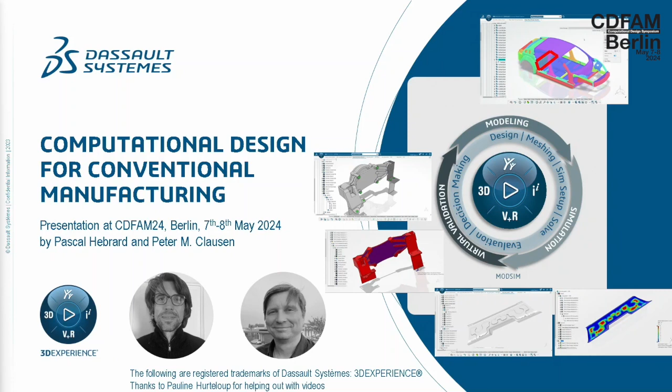I am from the simulation side of things, and we wanted to have another take on computational design, which many people have been working on for decades. I'm originally from Ole Sigmund's team, graduated back in 2005. We want to promote computational design also for conventional manufacturing, not only additive, and that's the theme of this talk.

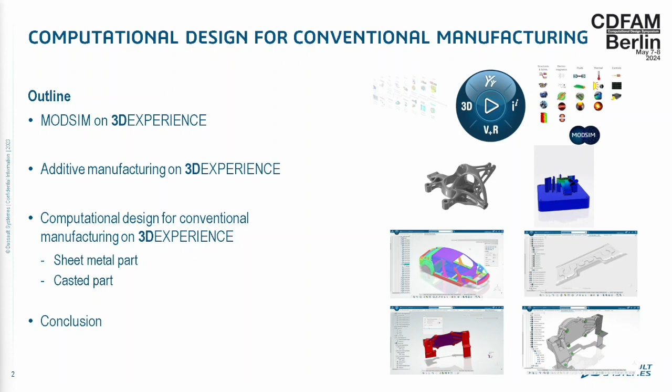The outline is: we're going to give a short presentation on what we call ModSim on the 3D experience. Then we'll briefly show what is possible today in additive manufacturing on the 3D experience with virtual prototyping. The main part of this talk covers computational design for conventional manufacturing - we'll take two parts, a sheet metal part and a casted part, and look at how that works from a computational design point of view. At the end, a conclusion and a small fun note.

Our legacy - Dassault Systèmes started back in the 80s. Abaqus, which is a finite element solver, started in 1978, the same year I was born. So we're talking about technology with quite a bit of legacy here, not like some of the startups that are probably only a decade or two old.

We started with 3D design, then digital mock-up, where you have not just one part but an assembly of parts, like an airplane or a car. Then 3D PLM, where it's not just parts but also processes - product lifecycle management. Then we moved into the 3D experience platform in the 2012s.

Here's a picture of a city where you're trying to virtualize - I think it's Singapore, yeah it is - a virtual prototype of Singapore. And we're moving into virtual twin experience for humans, so we bought Medidata back in 2019 or so. And we're moving towards the virtual twin experience for a sustainable world. I'm not sure what that means, but I hope this talk is on the way to that.

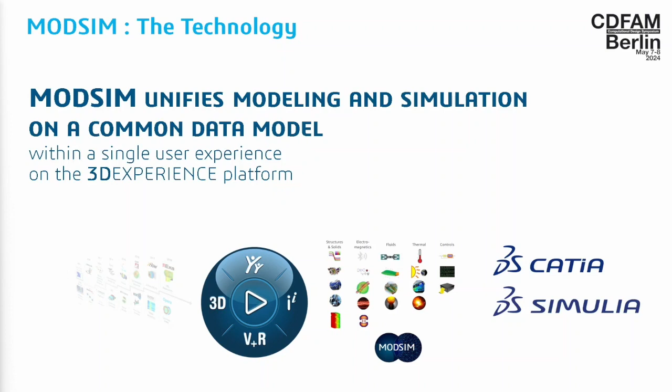The ModSim technology is basically combining modeling and simulation together in a common data model, in a single user experience on the 3D experience platform. It covers all of the physics we're able to do in our simulation. We're using mainly CATIA for CAD and simulation done by Simulia, so that would be Abaqus or Tosca - that's all running underneath.

The basis of this technology is that the old workflow basically starts with some design, and then you usually change into other products to do meshing, then execution, then post-processing, and often that can even be multiple products at some companies. That actually takes quite a lot of time to do this whole process.

The goal of the ModSim experience is you start with CAD up here, and you select your CAD, then you go into the CAE process. You do all of this, but all of it is on the 3D experience. Basically, when you go back - let's say you're doing optimization, so you do a CAE update - that forces some changes on the CAD, and then you can validate, and this loop goes on. We target to reduce the time to simulation.

Now I'll give the word to Pascal on additive.

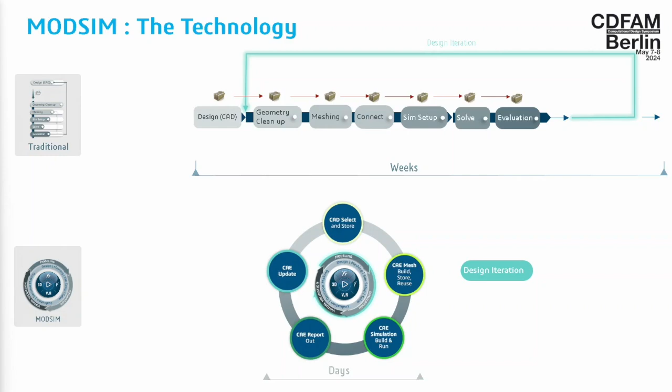We started generative design in the context of additive manufacturing and 3D printing because of the shapes produced by topology optimization. We started by launching topology optimization and giving some very nice shapes, but very complicated to produce except by additive manufacturing, on which, by the way, we have the full workflow, including lattice structure creation, with in the middle some images of the meshes with solid elements, shell elements, beam elements.

As we saw this morning, but also with another brand from Dassault Systèmes, which is Delmia, all the setup and the manufacturing simulation until the printed part. But together with topology optimization, or with other optimization techniques like shape optimization or bead optimization, we wanted - and we saw a lot of advantages - to use that technique in other domains. Like Peter said, for more conventional manufacturing processes, like casting, like milling, or bead for sheet metal, that we are going to show you now.

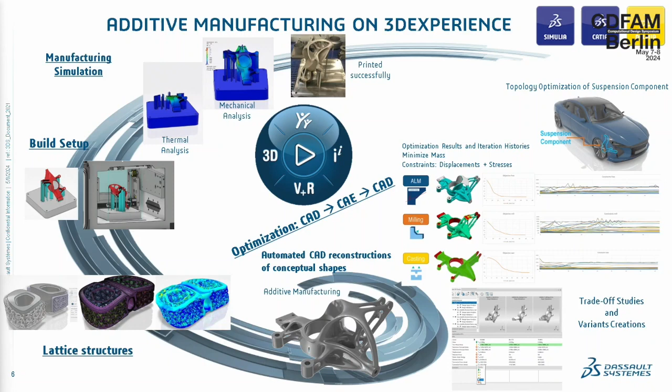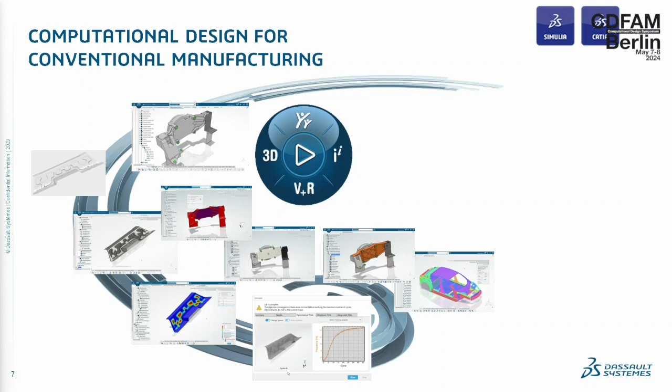Thank you very much. So we're going to show these two examples of computational design for conventional manufacturing. First I'm going to show bead optimization. It's basically just a sheet metal model, and then a topology optimization of a solid part, which is casted.

Let's say I'm in an automotive industry and I'm not producing just one car. This is what we call the blue car, a generic car we use for internal testing. I have some design of a part, and the eigenfrequency for that is too low.

The first thing I do is a naive bead design. Hopefully you can see here there's some small beads. That's a good choice, but the eigenfrequency doesn't change that much. So what can I do? Let's run a bead optimization.

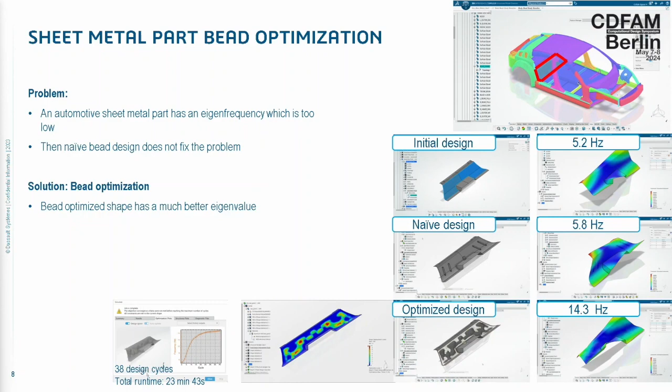I'm not going to go into much detail on how that's actually set up, but basically we're changing the positions of the nodes and running the optimization. It takes about 20 minutes on a laptop, and we get this very curved design out of it. The optimized design is a subdivision surface, so it is a CAD part, but not parametric in the classical sense of the word.

So the question is now, how do I actually get a parametric sheet metal part out of this? Because that's often what my other colleagues in manufacturing actually want. So Pascal, can you help me with that?

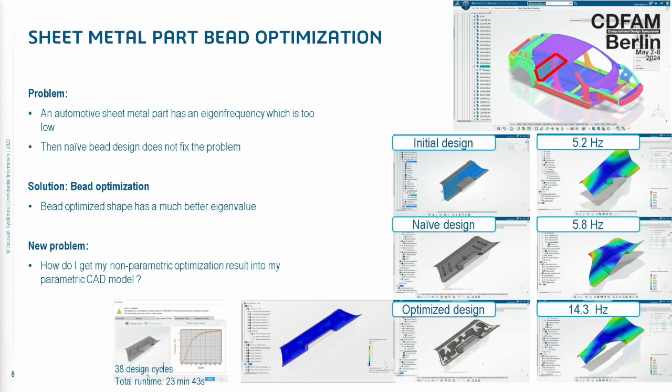So we will now play a video that has been recorded from the tool. I hope we will play the video. It's just at speed 1, it has not been accelerated.

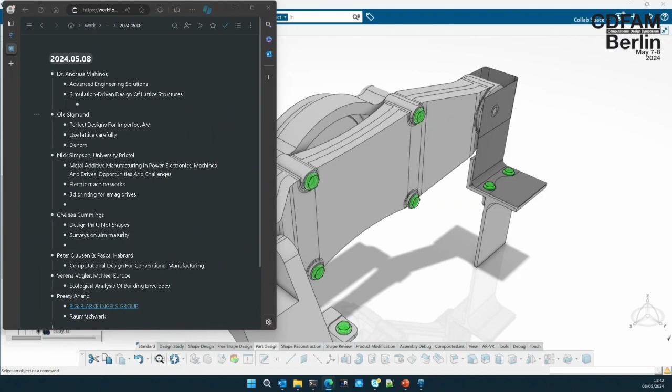So directly inside the optimization tool, we can launch a reconstruction, which is not to generate only a subdivision surface, but to automatically generate a CAD model, a CAD modelization of the bead optimization result.

And it should now run, but of course it doesn't run. It used to run. I don't know why it's not going. Now it's actually going, okay.

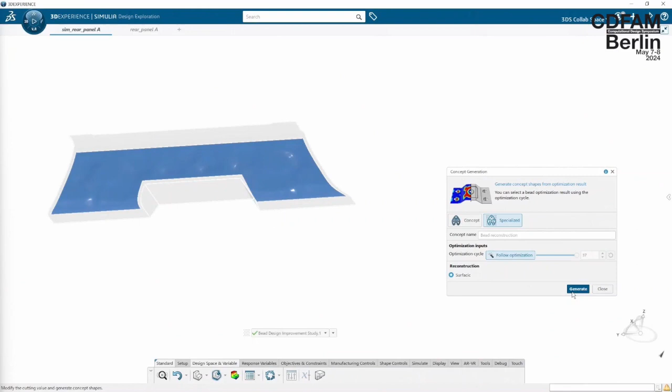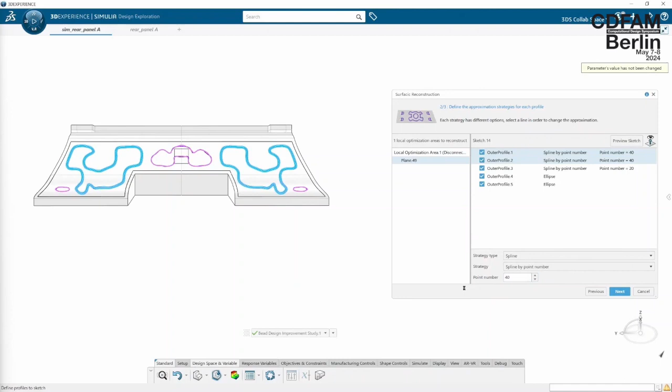Sorry about that. So we generate here a surface which is based on some ISO curve from the optimization. You can choose your reference ISO curve. And then we use the sketcher capability from CATIA in order to convert this curve into several types of sketch inputs.

We have several strategies. Here we are following a very complex geometry, but we can change that with several primitives, and afterwards we use all the CAD capability from the software.

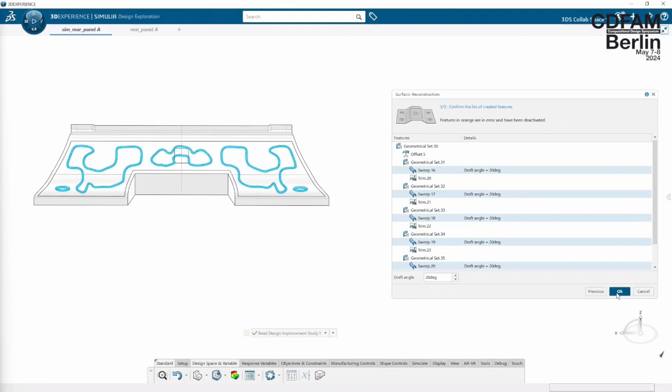For example, with the sweep managing the draft angle, we could have had fillets, and we finally have a part which is made thanks to the result from the topology optimization, and which has a full CAD parametrization, so it's ready for design of experiment.

All right, so here are the result validations. Basically we have first the initial design, then the naive design, then the direct result, which is kind of wild and bumpy. But then we have this really nice bead design.

Actually, we added here also some fillets to make it look nice and almost manufacturable. There's probably going to be some manufacturing people who say this is going to be really hard to manufacture. That's definitely a discussion worth having. But this just shows there's a lot of possibilities here with conventional design as well.

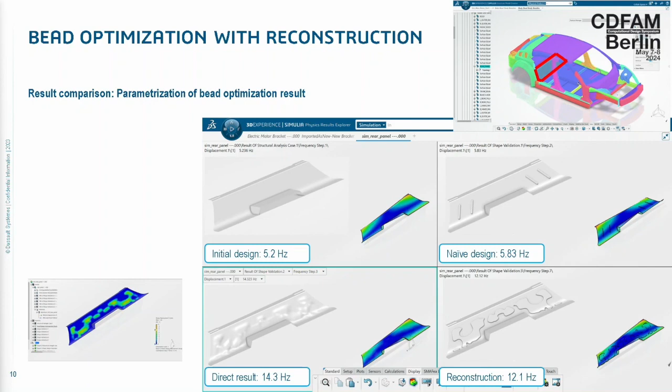So that was bead optimization. I should also mention we're losing a couple of hertz in the eigenfrequency, which is quite typical. When going from the optimized design into the parametric version, we lose something, but it's still a lot better than our initial design and much better than the naive design. All right, so the next one is this casted part.

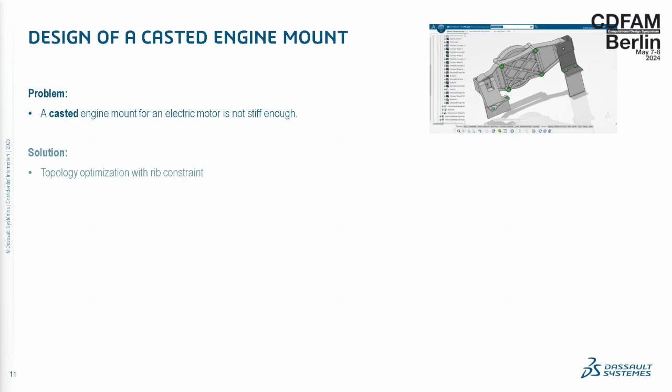This is basically just an engine mount. It's also a little bit of a generic model. You should imagine that on the end of this there's an electric engine, and this mount was designed by someone in the company, and we figured out it's not stiff enough.

So what we do is run a topology optimization. We want it to be casted, right? So we have many manufacturing constraints in our software, so you can do ribs, different casting, and so on, maximum and minimum member size, symmetry, and so on and so forth. Here we're choosing this rib constraint.

So what you have here is basically this topology optimization, which ran quite quickly on a laptop, about 8 to 9 minutes. Probably should have used a much finer mesh to get finer ribs, but this is not actually the point of the talk.

The point I want to make is that since 2016, we were one of the first companies to produce these advanced subdivision surfaces from a topology optimization, which is nice and cool, and it's a CAD surface. I can actually do stuff with that. However, it's not parametric in the sense of what we usually think about parametric.

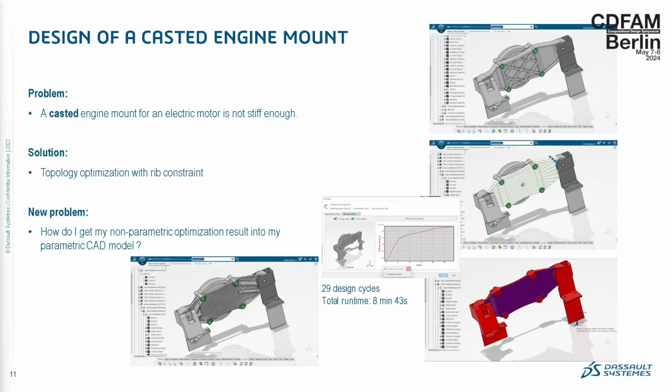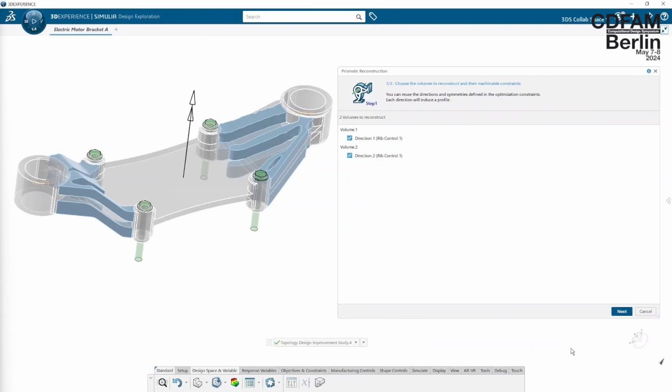So again, Pascal, what do we do with this? Here's a video that I hope will launch correctly this time. The idea is first to set the constraint directly in the topology optimization, and then in the reconstruction afterwards, reuse the CAD capabilities from CATIA to create a new kind of CAD, not made of subdivision surface, but classical modelization features like sketches.

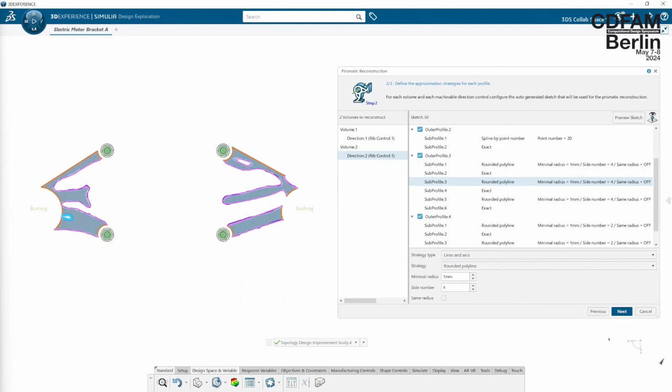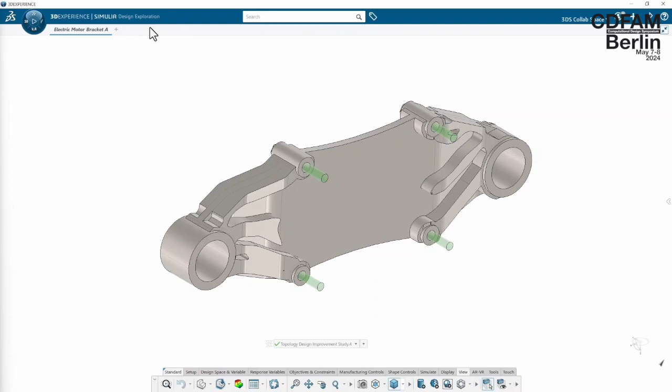So here you see the same kind of methodology and strategy to approximate the ISO surface using traditional features like pockets or Boolean operations, to provide a finished part to the end user that he can freely edit thanks to the CAD parametrization, with all the parameters automatically defined for him. All right, good stuff.

So now we have a parametric model, and we can do validation. A couple of points here: we have the initial design at about 5 kilos, with a maximum displacement of 7 millimeters. When we do the topology optimization, we're actually gaining a bit of mass.

The reason for this is a little hard to see, but due to the big flat structure, the subdivision surface is adding a bit of mass on the whole middle section of the structure, which shouldn't be there, making it heavier. When we go into the reconstruction part, we're back down to a good mass, below the initial mass, and we see that our displacement has decreased a lot.

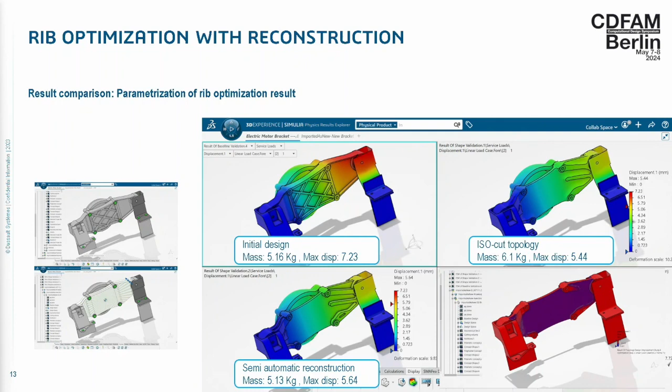The whole point of this talk wasn't to go into too much detail about the simulation and optimization stuff. At Dassault Systèmes, we can do much more complicated simulations and optimizations. We also have the capability to combine parametric optimization together with topology and others in single workflows, and we're working with CST, who got acquired by Dassault Systèmes, to do electromagnetic optimization on things like electric drives.

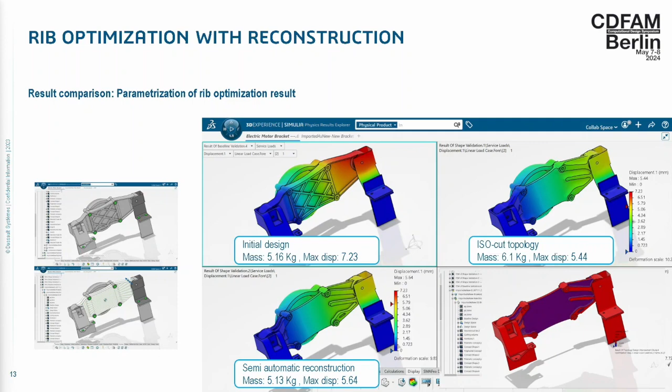We don't have time to show all that, so we're trying to stay within today's time limits and get to the conclusion. I hope I gave you just a little taste of what ModSim is—combining modeling and simulation in a single experience on a single platform—and that it's possible to do computational design not only for additive, but very importantly, for conventional manufacturing.

This is really essential for any big industries building cars, planes, or anything with large numbers of parts. It's really important for industrial applications to have end-to-end workflows. I think a lot of colleagues from other companies showed that as well.

So in my mind, the result of an optimization is a new CAD geometry—not just a density field or an isosurface. It should be the thing that actually goes into your product, your car, your iPhone, whatever it is.

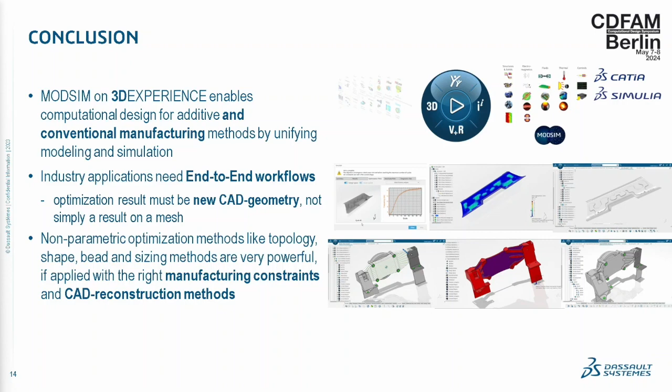And I think non-parametric methods are really powerful. Topology, shape, bead, sizing, whatever—they can do a lot of cool stuff, but you need the right manufacturing constraints and CAD reconstruction methods to be able to use them in an industrial setting. And then, lastly, I'll give the word to Pascal.

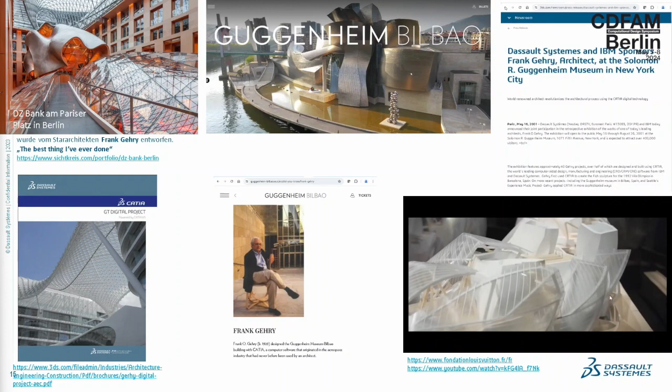This building was built and designed by Frank Gehry, who has been a user of CATIA for decades. He used CATIA to design this building, but also the Guggenheim Museum in Bilbao and the Fondation Louis Vuitton in Paris. So be careful using that kind of software—you may also be inspired to design some very nice product like this one. All right, thank you very much.